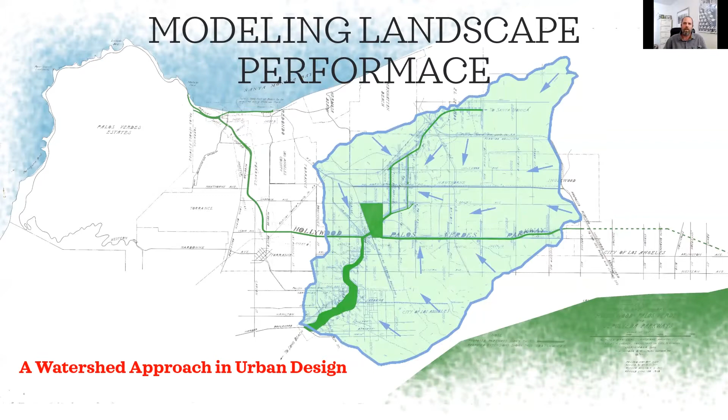Hello, I'm Aaron Liggett. Today I will be presenting to you my research on modeling landscape performance of a watershed approach in urban design.

I am a practicing landscape architect in the state of California and a faculty member at Cal Poly San Luis Obispo. I work on a wide range of projects and instruct an array of classes, which has influenced my research direction, focusing on technical aspects of ecological design with an emphasis on stormwater management and sustainable practices.

I would like to acknowledge Dr. Christina O'Hara, a colleague and mentor of mine at Cal Poly San Luis Obispo, who has encouraged me in this study. Her PhD thesis on the Olmsted Brothers provides insight that was invaluable in discovering the outcomes of this study.

This study presents methods to simulate, test, and interpret how natural systems might have interacted with the built environment. Using these methods, I will examine the proposed designs by the Olmsted Brothers landscape architecture firm of a greenbelt network planned for Los Angeles during the 1920s, along with understanding various systems of the multifunctional parkways.

This process will visualize how the parkways would have managed stormwater in the watershed of an urban context, a context experiencing rapid population growth and increasingly frequent major storms.

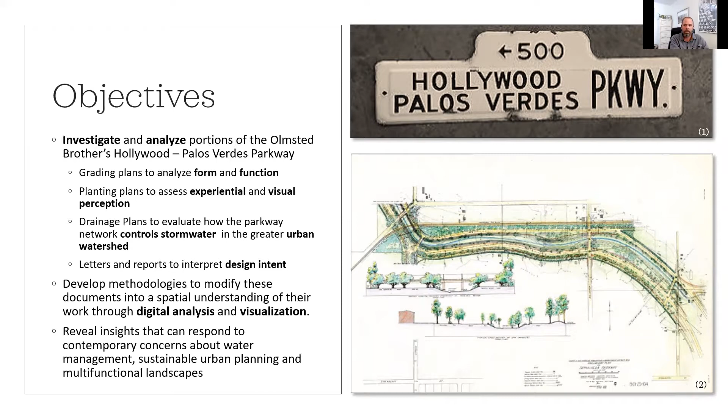Lastly, the objective is to reveal insights that can respond to contemporary concerns about water management and sustainable urban planning and multifunctional landscapes.

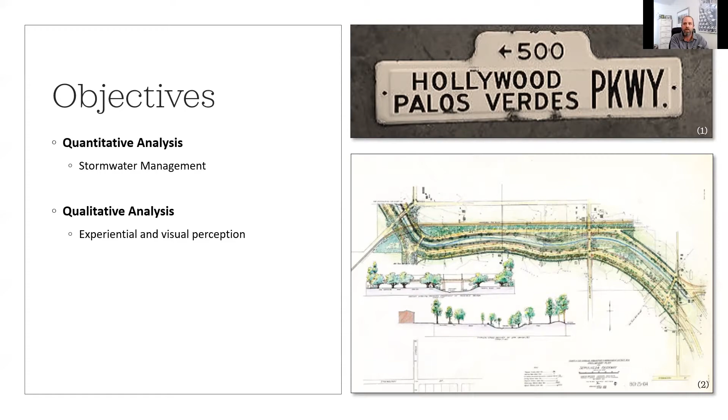To evaluate the function of the parkway, stormwater management is analyzed as it is the only quantifiable element. In a qualitative analysis of the parkways, digital models recreate designs in the greater contextual landscape to help visualize how the parkway may have appeared.

To understand geographic, political, and cultural context, historic documents, photographs, and geopolitical maps are compiled, along with quantitative and qualitative letters and reports written by members of the Olmsted Brothers firm.

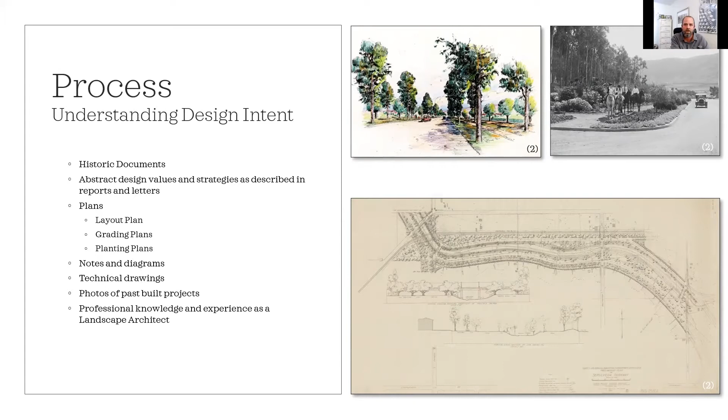To understand design intent, I use my expertise as a landscape architect to interpret and abstract design strategies by deconstructing plans, technical details, and illustrative drawings. Additionally, I viewed photos of past built projects to identify details and how users interacted within the design spaces.

A variety of digital software is used in the process to interpret, analyze, calculate, and visualize the functional outcomes of the design and how the parkways handle stormwater during large events.

While I evaluate, so what? Did the process work? Would the parkway have been successful? And what do we take from the study? In order to answer those questions, the project shall be evaluated across a set of ordering systems which evaluate the success across economic, environmental, functional, sociocultural, and aesthetic realms. However, this presentation focuses primarily on stormwater management as it's the only quantifiable element.

During the 1920s, Los Angeles was the fastest growing urban community in America. Despite this huge population influx, Los Angeles was being built without a comprehensive master plan for growth. Haphazard urban sprawl led to disconnection of new communities from established roadways. Los Angeles had the largest per capita ownership of automobiles, which led to new landscape types and shifts away from public transit. Additionally, there was increased desire for recreation.

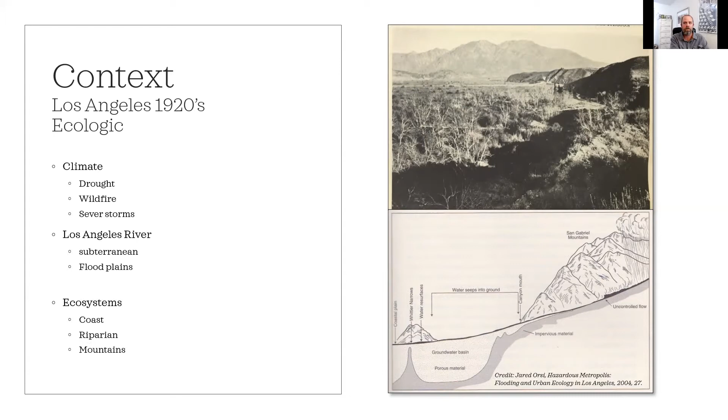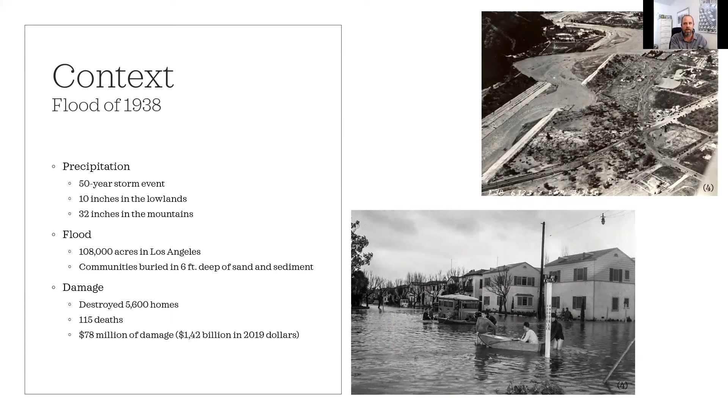The Los Angeles flood of 1938 was one of the largest floods in Los Angeles history. The flood was caused by a storm that generated almost 1 year's worth of precipitation in just a few days. 108,000 acres were flooded, destroying 5,600 homes. This study uses the rainfall data from this storm event to predict how the parkway would have performed during the storm, which occurred 10 years after the proposed designs.

In response to the ecological and cultural strains on Los Angeles during this time, there was a movement for improved landscapes, which called for the efficient management of water, expansion of public parks, and new transportation infrastructure.

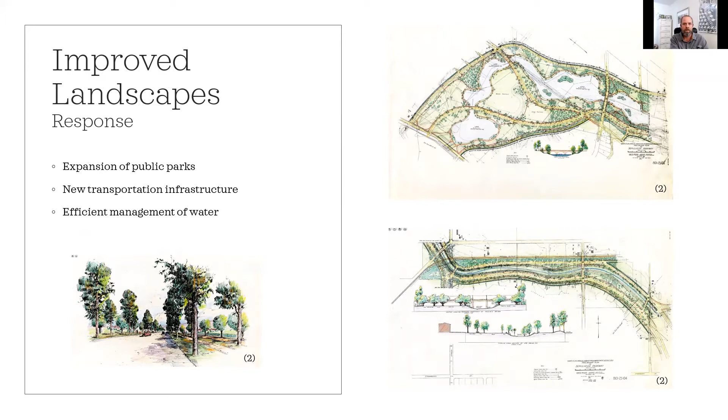A solution was proposed by the Olmsted Brothers: construct a series of interconnected parkways that would serve as multimodal transportation routes while also providing green space for recreation, wildlife habitat, and stormwater management. With over 2,500 projects across the US and dozens of public projects in Los Angeles alone, the Olmsted Brothers were leaders of their time in ecological and urban planning.

Reviewing plans and reports written by the firm, along with scholarly research performed by others, a list of guiding design principles and approaches are abstracted that the Olmsted Brothers carefully measured. Having the foresight to consider these characteristics and prioritize these values was revolutionary for the time, and even today.

Many of the factors here were considered and integrated into their improved landscaped parkway proposal. However, this study focuses on the functional components, in particular on how the parkways would have managed stormwater.

What emerged was an extensive system of parkways that connected the business district in Los Angeles to the surrounding neighborhoods and recreational amenities. Labeled the Hollywood-Palos Verdes Parkways, the greenways would link the county of Los Angeles from the mountains to the sea and further inland along the Los Angeles, San Gabriel, and Rio Hondo rivers.

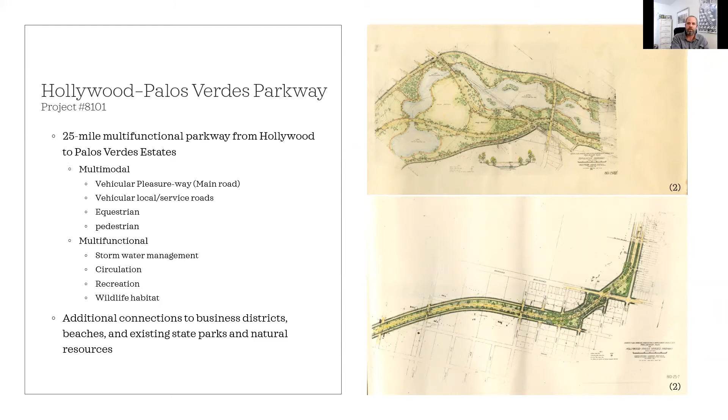In addition to controlling stormwater, the channels also provide green space amenities and act as wildlife corridors. Paths run along the edge of the parkway for pedestrian uses. A pleasure drive and through traffic roads are located on either side of the channel. The drive is more enclosed by vegetation and is used for leisure driving, while the road is a route for commuting. An equestrian riding path runs linearly with the parkway. And a service road and a sidewalk facilitate the local community.

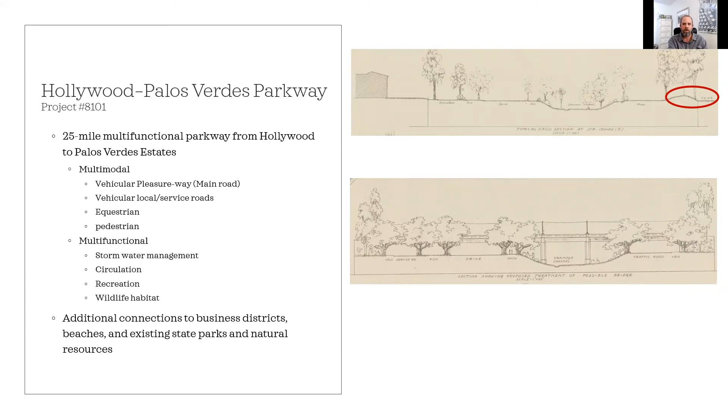In some instances, the parkway runs alongside a railroad, which is typically treated with a vegetative berm to function as a visual and noise buffer. Vegetated buffers separate modes of traffic while providing a sense of safety and immersion into the parkway. Layers of different sized trees soften the scale of the parkway with the neighborhood's edge, while creating a dense vertical ecological structure that enhances the user's experience and could be suitable for wildlife movement and habitat connectivity.

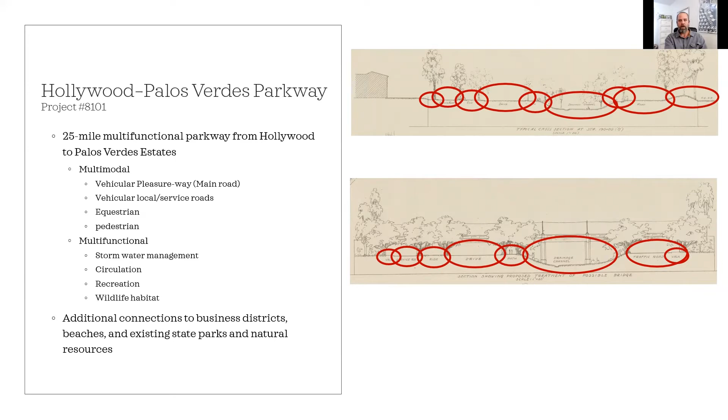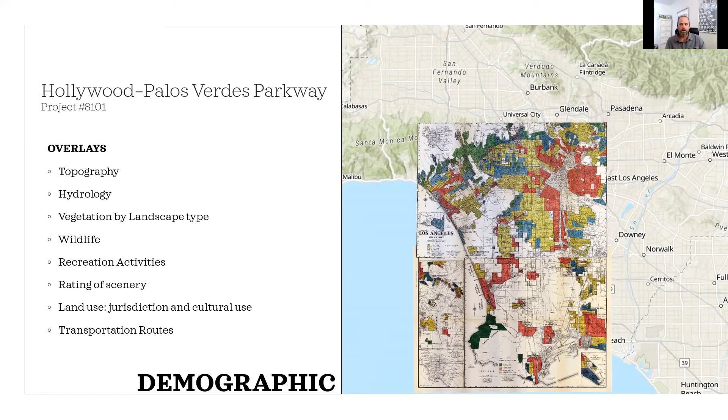These are just two examples of the parkway layout. You will see that the spatial arrangements of the design elements vary depending on the surrounding urban and natural context. The Olmsted Brothers use layers of information to decide the most suitable land for the parkways. To search for spatial patterns in the parkway layout, I use GIS to recreate the social, political, and ecological elements of 1920s Los Angeles, such as demographics, transportation, topography, hydrology, and existing state parks.

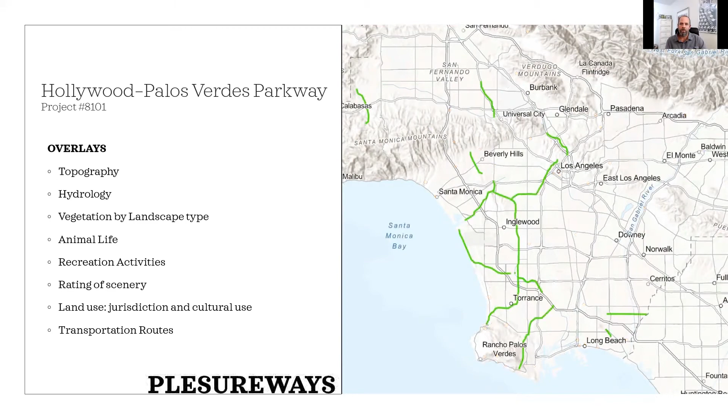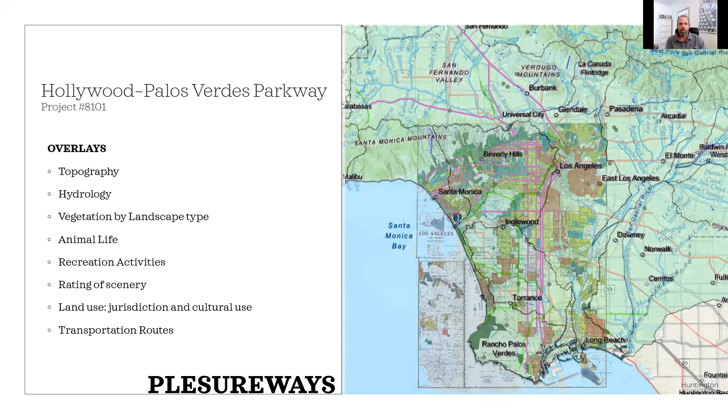Additionally, existing Olmsted projects were mapped to understand how they may have influenced the location of the proposed parkways, which is shown here. When overlaid, what stood out most to me was how the parkways veined across the watershed, creating somewhat evenly spaced sections within the Dominguez watershed, which is my area of focus.

Here is a further developed conceptual plan from the Olmsted Brothers showing the network of existing state parks and their greenway network through Los Angeles County. Overall, it was easy to conclude that there was a strong correlation with all these layers of information with the GIS overlays.

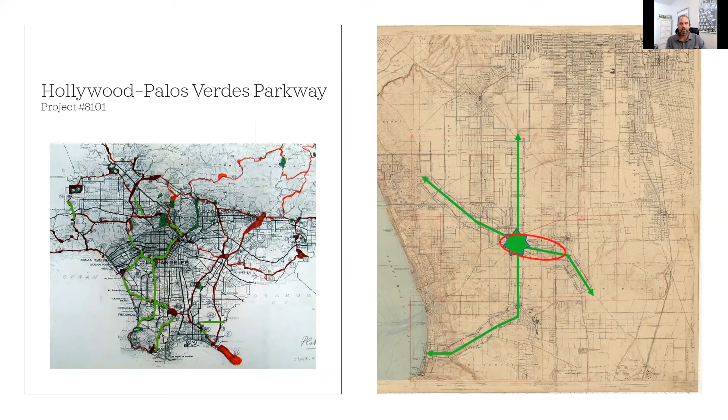Note that it is a major hub and location where parkways intersect.

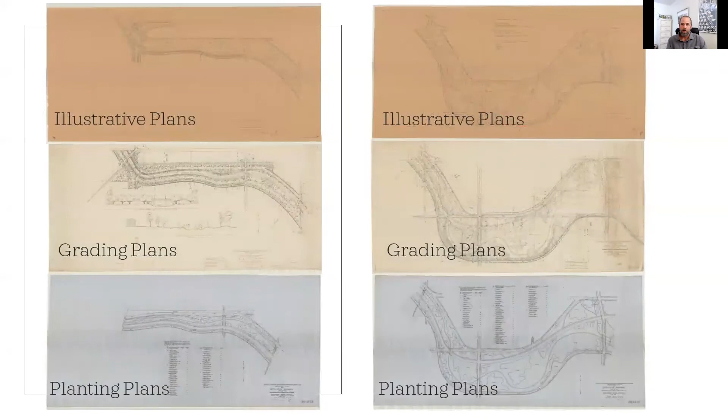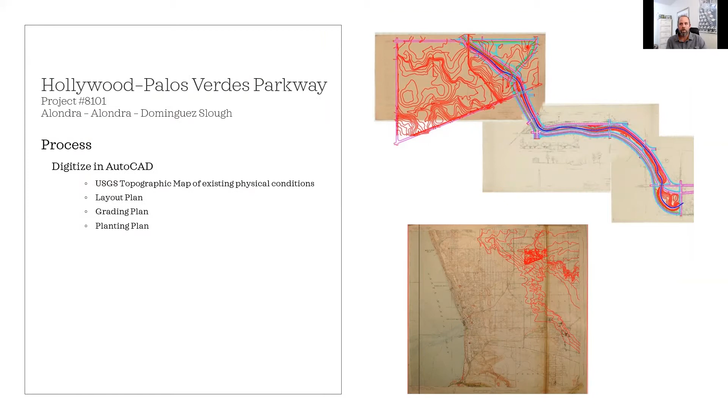So the first step was to gather and interpret archived plans. I had full sets of illustrative layout plans, grading plans, and planting plans, and they were stitched together. Once digitized, I traced them in AutoCAD. In addition to the proposed grading plans, the existing topography of the surrounding context was scanned from a 1926 USGS survey map. When overlaid, the proposed grading design and approaches became more apparent.

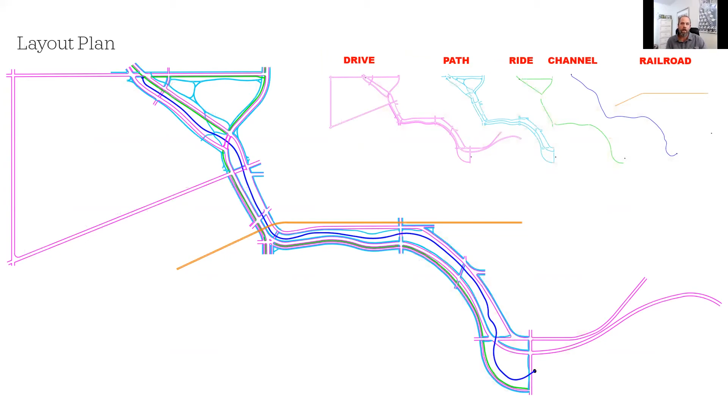After being digitized in CAD, one can clearly identify the different designated uses in the parkway, with separate routes for automobiles to drive, pedestrian paths to walk, equestrian riding paths, channelized water, and trains. It is quite a complex interwoven network organized around the central channelized water.

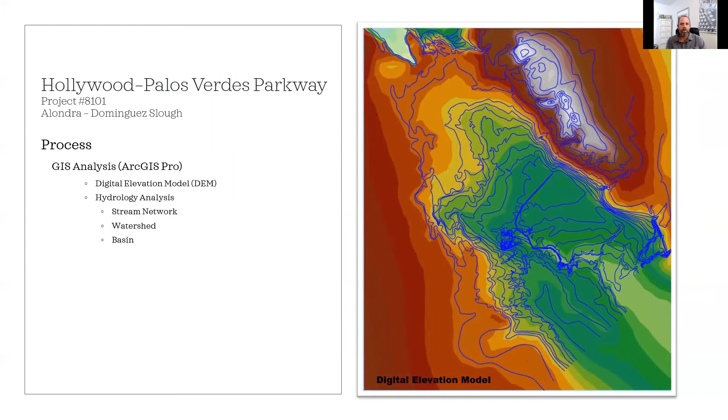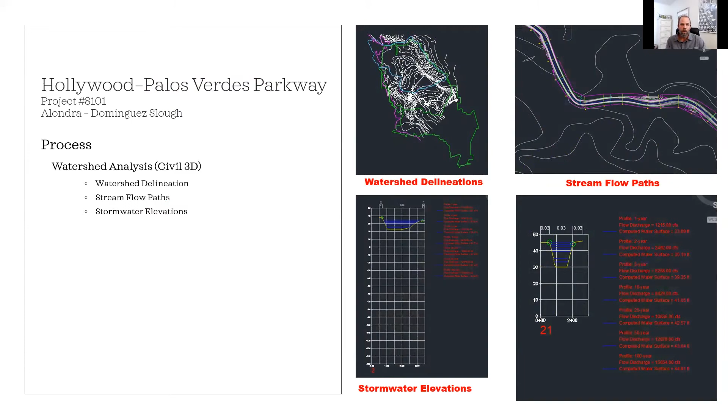The CAD line work was also incorporated into GIS to analyze topographic, hydrologic, and spatial data. It was also manipulated in Civil 3D for watershed delineations, stormwater elevations, and stream calculations. I evaluated the watersheds that were derived from the drainage plan created by the Olmsted Brothers and compared them against the contemporary ESRI watershed.

What is fascinating is that the watersheds delineated by the Olmsteds were nearly identical in form and size to the watersheds delineated today with modern technologies. The care and accuracy that the Olmsted Brothers put into their drainage plan is not only remarkable, but demonstrates how significant it was to the success of their parkways. And once again, note there is a clear pattern in how the parkway is spread out evenly across the watershed.

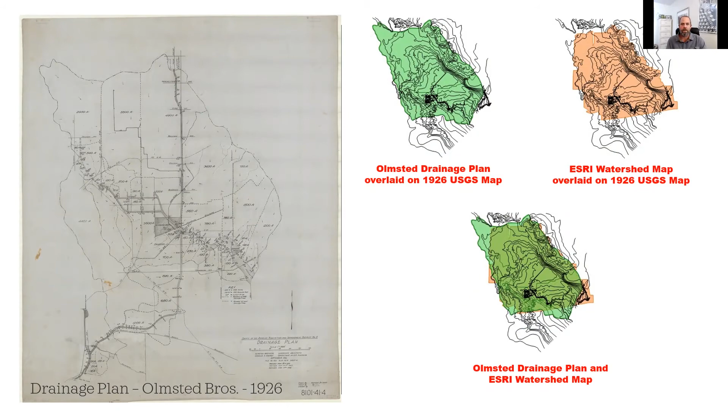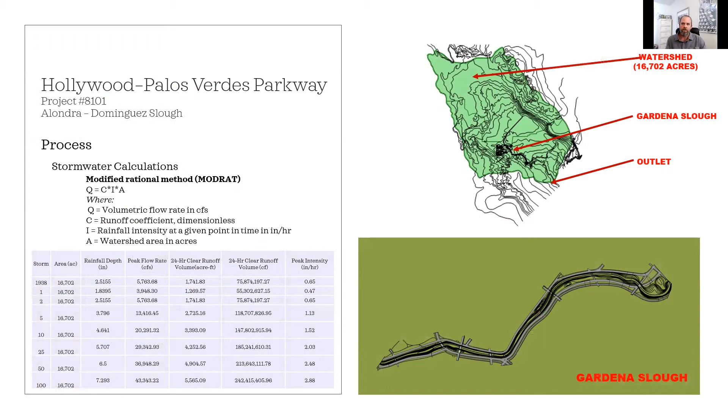Based on the watershed size, soil type, land use, and slope of the terrain, the volume of the stormwater runoff was calculated for different intensities of storm events. Using Civil 3D's storm and sanitary analysis, the water height of each basin is calculated, which when modeled in SketchUp creates a visualization of how the proposed basins could have retained stormwater, from a normally dry landscape void of water, to different levels of storm events.

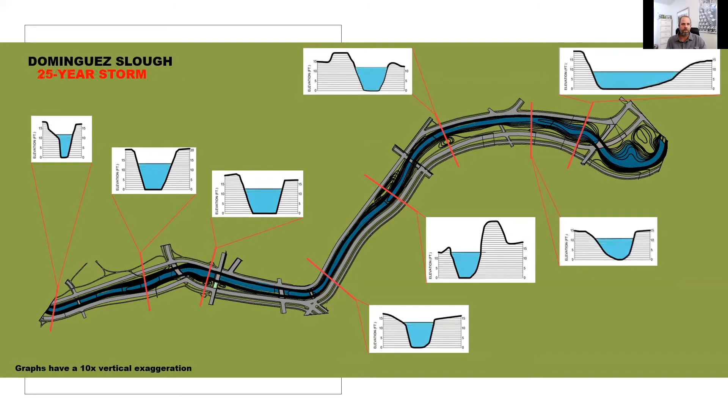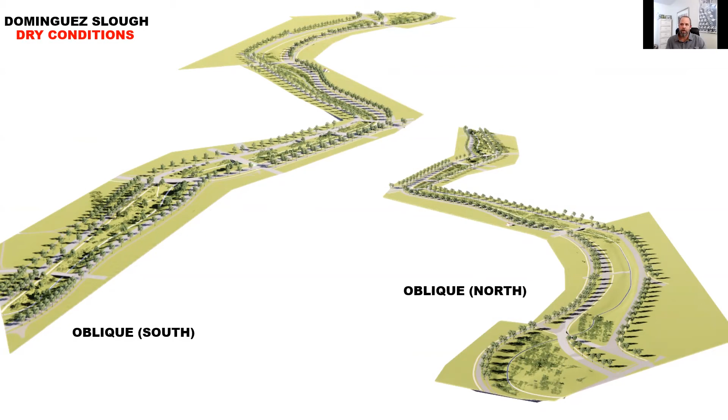The maps were imported into 3D modeling software in order to orbit and visualize the landscape in oblique projections. Visualizing the spatial qualities, we can get a hint of the experience of being immersed in the parkway and communicate how the parkway would perform during heavy rainfall events, creating habitat and transformations into unique landscapes.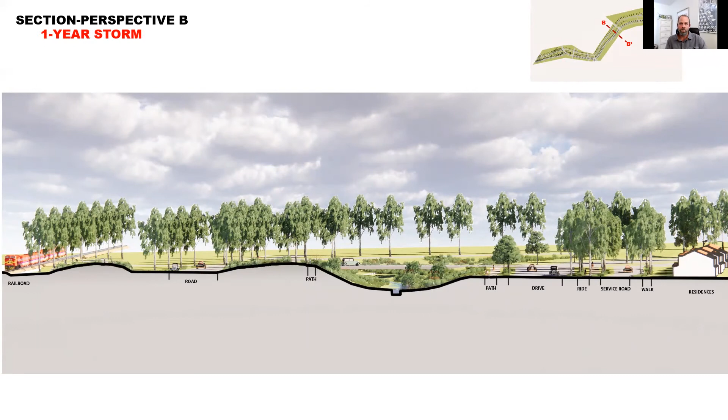Vegetative buffers comfortably separate paths into a multimodal transportation network in a multifunctional landscape as it controls stormwater to prevent flooding and maintain a functional parkway during extreme weather. While some portions of the parkway lead you into the channel, providing you opportunities to interact with nature, others use landforms to buffer adjacent uses and better control stormwater due to the existing site conditions. They also communicate how the parkway would perform during heavy rainfall events.

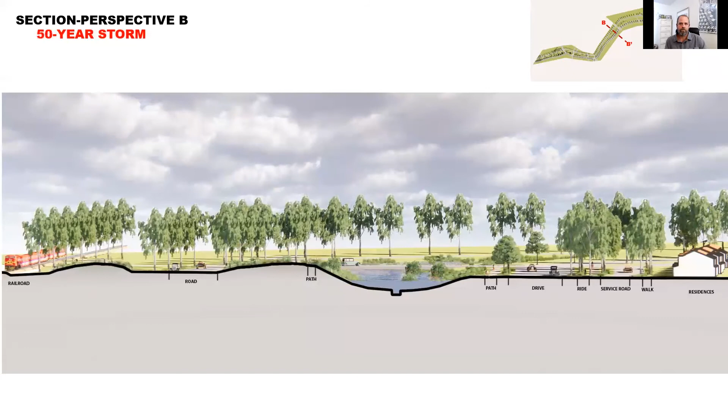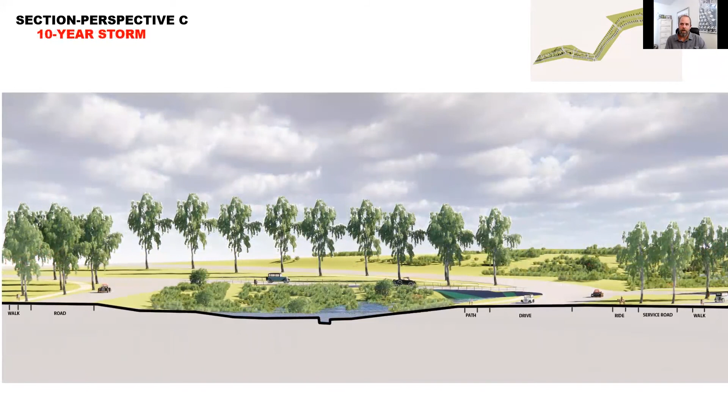A characteristic to note is that the further downstream along the corridor one gets, the wider the corridor gets, and the channel gets, increasing its capacity to hold more stormwater. When compared to the storm event that occurred in 1938, these portions of the parkway would have successfully managed the stormwater.

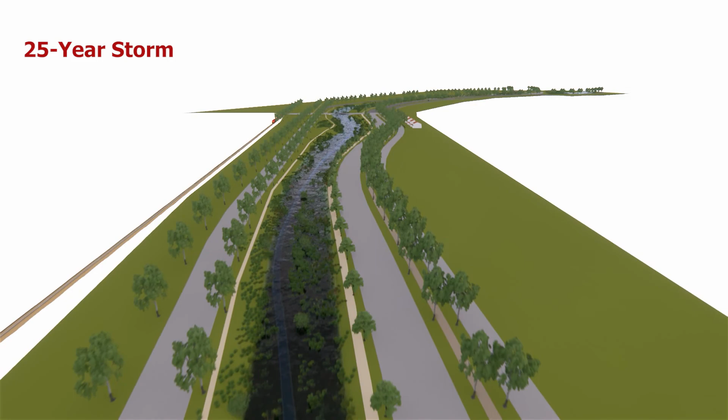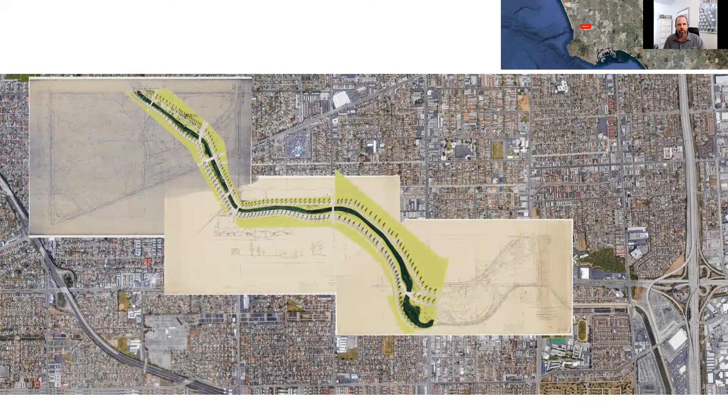Let's take a look back at the context of today. As you can imagine, Los Angeles appears much different today than what the Olmsted Brothers had imagined. While some of their ideas eventually inspired some completed projects, such as the golf course at Alondra Park, their dream of a linear parkway network was never created. However, we could start to imagine what it might look like if it did.

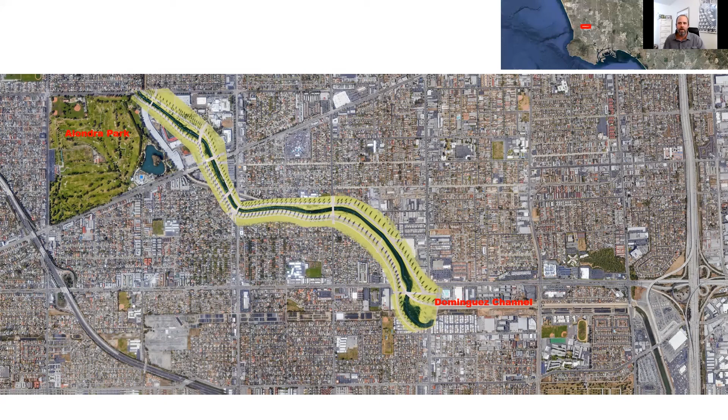A series of interconnected parkways that would serve as multimodal transportation routes through areas of diverse demographics and uses that provide green space for recreation, wildlife habitat, and stormwater management. While the parkway plans were abandoned, the city eventually did begin constructing a series of stormwater control channels, however with the sole function of gathering and transporting stormwater as quickly as possible.